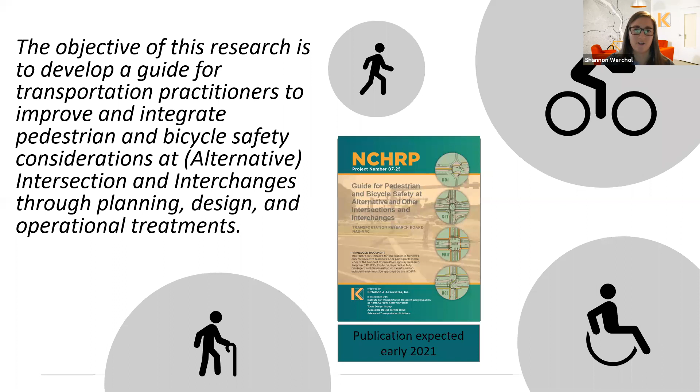We wanted to consider moving beyond just standard accommodations. Oftentimes we get into design and we're working on operations: how long should our turn bays be, how many lanes do we need. Then we move into final design and get all the way to the 90% plans, and then you pause and say, wait, so where are we putting the sidewalks? Or what are we using, bike lanes, are we using shared use paths? You can get pretty far into the design without stopping to think about those things, and that's one of the aspects we wanted to change, moving past standard accommodations.

The guidance document has a methodology that applies to all intersections and interchanges, but we did focus on five specific interchanges and intersections shown here on the screen, and there's a chapter for each of them specifically in the guidance.

Considering the intersection context, we know there are multimodal benefits of alternative intersections and interchanges. We use them because they reduce conflict points, and there's potential for also reducing pedestrian-vehicle conflict points. By moving towards simplified two critical phase traffic signal control, we can reduce the confusion of pedestrians about when is their appointed time to cross the street. There's benefits there—alternative intersections tend to provide lots of ability for refuge islands, breaking up the crossing distance to address pedestrians who may be moving slower or need additional time to cross for various reasons.

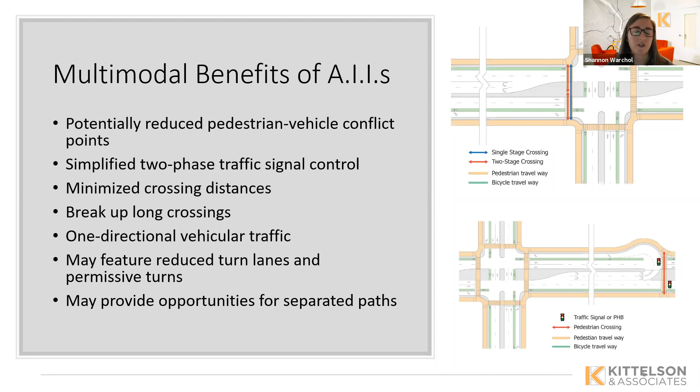But there's great opportunities in alternative intersections for separated paths. In general, the land use that you would need for an alternative intersection is less than what you would need for a comparable standard intersection or interchange of the same capacity. So why not use some of that extra land for pedestrians and bicyclists?

Now, there are some drawbacks to alternative intersections and interchanges when it comes to pedestrians and bicyclists. While we do provide for a lot of refuge islands, that can make for some confusing crossings. Here we have a displaced left turn intersection. You can see that to go from south to north or north to south, you have 4 different stages of that crossing. It may not be obvious to a pedestrian standing at ground level exactly how to get across this intersection, and that's a real challenge we need to be mindful of.

Even though we've separated this, so each crossing you're only moving across one direction of traffic, it's not always obvious which direction that traffic is coming from. A pedestrian crossing at point D may or may not realize which way traffic is coming from and which way to look for potential vehicles. So these are some concerns that we have with alternative intersections and interchanges.

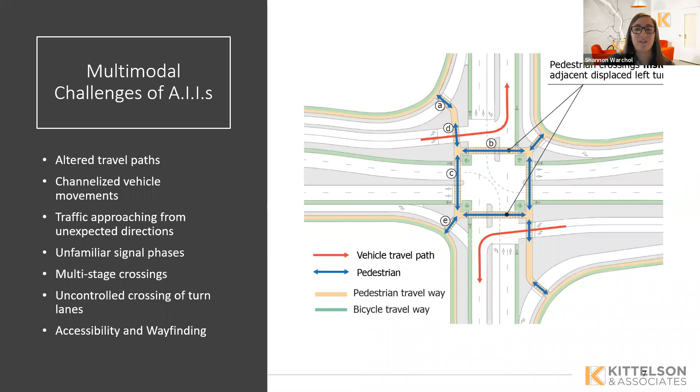But in thinking about this from a performance-based design process, it's important to remember that alternative intersections are just intersections with some unique features. I'll say that again. One of our engineers out in Portland, Brian Ray, is a big proponent of this idea: alternative intersections are just regular intersections with some unique features. So we don't need to approach our design process in some brand new way.

Approach your design process the way that you do for any other intersection, and then just key in on those unique features and really focus in. So from that mentality, we have this performance-based design process, and it starts with identifying your intended outcomes. From those outcomes, you can then make your decisions and evaluate whether or not your design meets your intended outcomes. If your outcomes are not met, then you either need to adjust your outcomes or adjust your design. We can repeat this cycle until we've moved to our construction set.

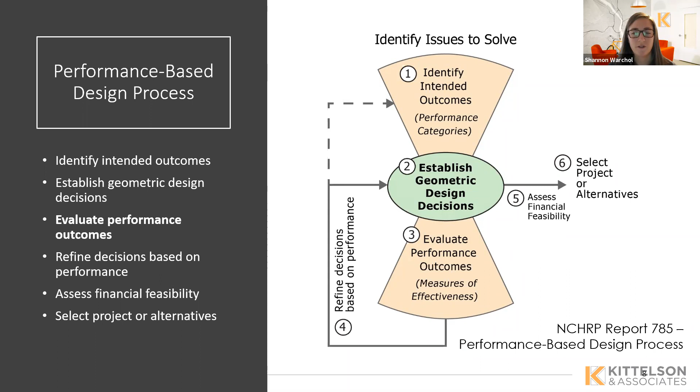The methodology that we developed in report 948 is intended to be integrated with ICE, the intersection control evaluation process. ICE, as it exists currently in about 8 states, with 6 or 7 states working on ICE policies coming up. Pennsylvania has an ICE policy. A lot of those policies focus on operational impacts for vehicles and safety impacts for vehicles, and there wasn't a great quantitative measure of how to evaluate these at the planning level for pedestrians and bicyclists.

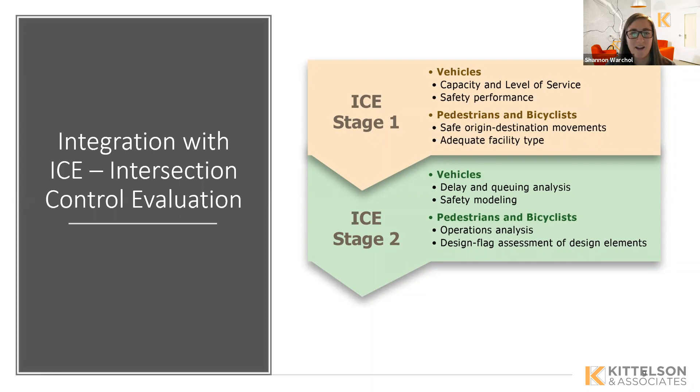So one of the outcomes of this project was looking at a quantitative planning level methodology to evaluate our intersection based on those objectives we identify in the first step. The report details what we call the 20 question methodology, which walks through 20 different questions you should ask yourself about the pedestrian and bicyclist facilities at an intersection. There's a quantitative scoring way so that when you're in that alternatives analysis, you can objectively score one design versus another.

Now, there was a whole separate presentation that focused just on this design methodology. It was, unfortunately, held in the last session, but there's a recording, so go ahead and check out that presentation from Bastian Schroeder if you're interested in hearing more. But I want to focus on the specific intersections, those 4 of the 5 specific intersections we looked at in the design, and kind of unique aspects to consider when designing these intersections.

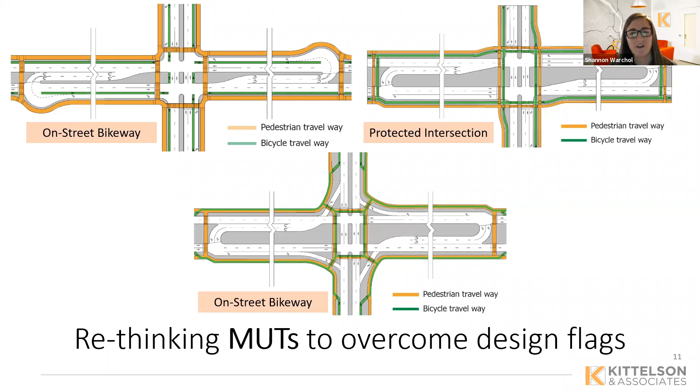So for each of the 4 designs, you'll see that we have 3 or 4 different variations of how they can be placed. Here we have the median U-turns. In the top left, we've provided on-street bikeways with our sidewalks. We have mid-block crossings. On the right side, we presented an example of how a protected intersection concept could be applied to a median U-turn. And on the bottom, it should be a shared use path concept for our bicycles and pedestrians, so everyone is off the roadway on a shared use path and then crossing with the pedestrian movements.

Two things you want to think about when considering median U-turns: that mid-block crossing. One of the great benefits of median U-turns, and even more so of the R-cut, is that it's much easier to provide 2-way progression. Median U-turns are still challenging because both the eastbound and westbound movements are still coupled at that main intersection. But adding a mid-block crossing, while you do have to signalize the eastbound movement where it otherwise wouldn't be, often this westbound movement is already signalized. So if you can provide coordination from your main intersection through to your pedestrians, you may be able to get this mid-block crossing in without major operational impacts to vehicles, but providing a huge benefit to pedestrians who may want to cross at a smaller spacing. So it opens up new opportunities to provide additional spacings for our pedestrians.

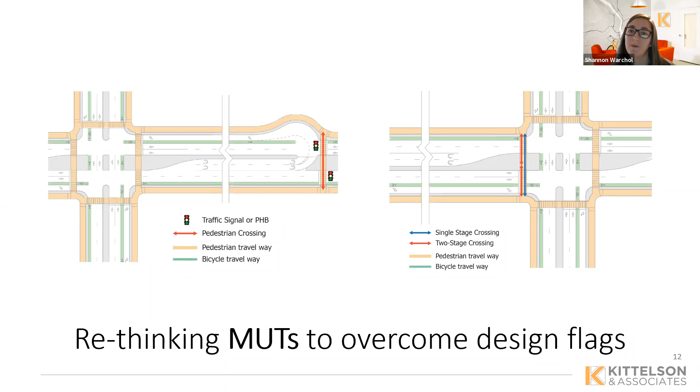The second thing to think about on median U-turns is that they often come with wider medians to allow for wide vehicle U-turns at those U-turn bays. Great opportunity to think about how to stage the pedestrians, whether you want them to cross in 1 stage or 2. Important to think about, if they're going to be staying there for 2 stages, it's really nice to provide a welcoming area for them to wait. We don't want to hit the minimum 6-foot distance. I always think about if you're a parent traveling with a bike trailer - do you have your front wheel out in the road, or do you have your kid out the back in the road? So 6 feet doesn't always accommodate everyone trying to move through our intersections. So if you're going to do that 2-stage crossing, use the right of way you have, give them a nice area to wait so they don't feel like people are whipping past them with inches to spare.

R-cuts, then we had 4 examples of R-cuts. Again, on the top left, we have our on-street bikeway. You can see that we coupled that with a shared use path, so our green lines are our bicycle travel way, and bicyclists here could either be on road or on the shared use path. Nothing says we can only give bicyclists 1 way to move through the intersection - different levels of comfort for bicyclists. Maybe a bicyclist who wanted to make a left turn at the median U-turn, instead of having to shift into that left turn bay, which can be very daunting on these 55-mile-an-hour roads, maybe they choose to use an off-ramp onto the shared use path and cross as a pedestrian instead.

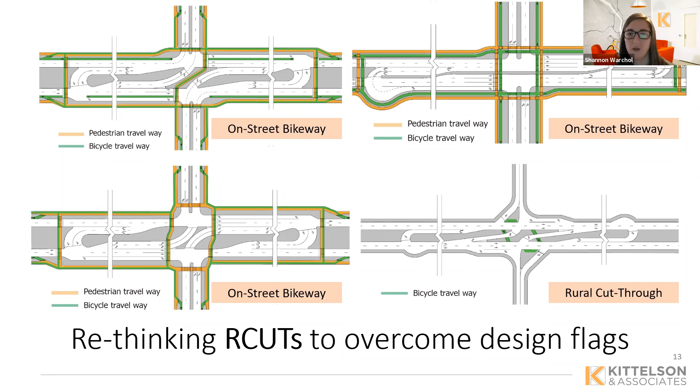On the right side, we have that protected intersection concept. Bottom left, we have our shared use path - looks like some of my labels didn't update here, but it's the shared use path concept, and I'll jump into that one a little bit more in a second. Then on the right, we have the rural cut-throughs. Not ideal here that we don't have a lot of pedestrian and bicycle facilities, but an easy way, if we do have an R-cut that we want to retrofit, is to add some easy cut-throughs - maybe it's a Saturday bicyclist group that rides through an R-cut often on the minor road, and they just need to cross that major highway. Making some easy cut-throughs for them so they don't have to make the right turn, the U-turn, and then the following right turn.

On the left, we have our bike lane and the path, so again bikes can choose to be on the road or on the shared use path. On the right side, we have our protected intersection concept. And on the bottom, we have an idea called the median walk.

Essentially, instead of making a pedestrian in the northeast quadrant who wants to move west along the intersection detour well out of their way—crossing the north-southbound roadway and then going back north to get up to the sidewalk—why not just walk them right down along that median walk? Now, this requires more right of way. You want to make sure that's a welcoming environment with lots of space. We don't want to just meet that 5-foot minimum, but it's a potential option to avoid extra distance traveled for pedestrians.

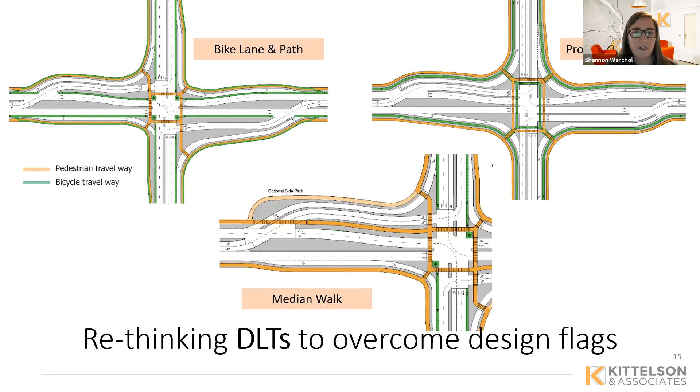Really important for DLTs, critical to think about them before you start your design. They have a huge impact on your operations. You have your outside pedestrian placement on the left and your inside pedestrian placement on the right.

What I want to talk about here is your left turn pedestrian conflict. If you have your pedestrian crossings on the outside, you no longer can cross your pedestrians at the same time as that major street left turn. So a pedestrian crossing movement B would be in conflict with your eastbound to northbound left turn.

Obviously, the great benefit of displaced left turns is their ability to move all the east and westbound traffic together. If you have pedestrians on the outside, you can no longer move eastbound-westbound pedestrians with your eastbound-westbound left turns. So it's very important to understand, from an operations standpoint, how your pedestrians are going to be set up at this intersection, because it impacts the amount of time that left turn has, and all of your queues essentially. If you need an additional critical phase—going from 2 critical to 3 critical—because those left turns need to be separated, that has great impacts on your cycle length and therefore your queues.

On the right side, however, you can do an inside pedestrian crossing. You can see now a pedestrian crossing at crossing B could turn with those left turn vehicles. Now this requires a few more stages for your pedestrians, but the operations are a little bit better. So again, there are trade-offs—neither is better than the other. They both have pros and cons, but it's very important to think about from a design standpoint.

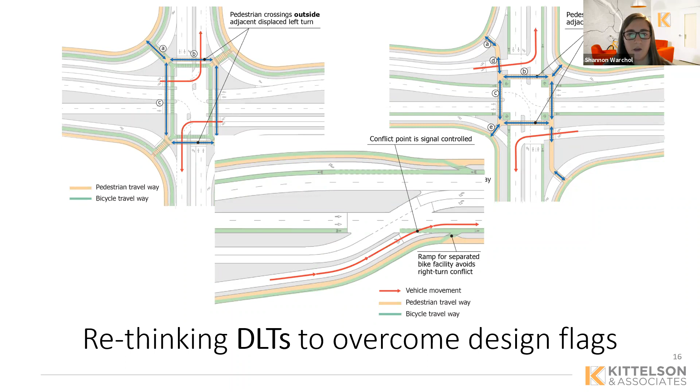Another feature in a number of these designs is this off-ramp feature. Here we have the crossover of a displaced left turn. Our displaced left turn is over to the left of this image, but you can see a ramp here for the bicycle facility. So if a bicyclist chooses, they could remove themselves onto the sidewalk instead of going through the intersection on the main road.

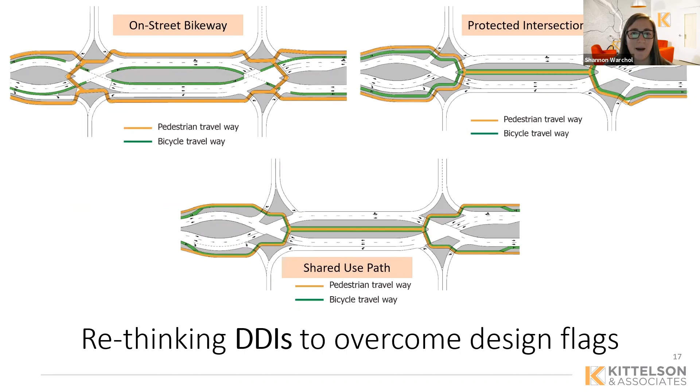And then for DDIs, again, we have our on-street bikeway on the left, our protected intersection on the right, and the shared use path on the bottom. A big thing for DDIs is the inside versus the outside crossing—I think a lot of people are familiar with that.

One thing to really think about on that outside crossing: here we have our one crossover for our DDI. This is what we have highlighted here in the box—the entrance ramp to the freeway. The placement of those pedestrian crossings is critical. We know that if we place the pedestrian crossing upstream of the center of the intersection, vehicles will be traveling at a slower rate of speed because they're slowing down into the turn, and they're more likely to yield to those pedestrians.

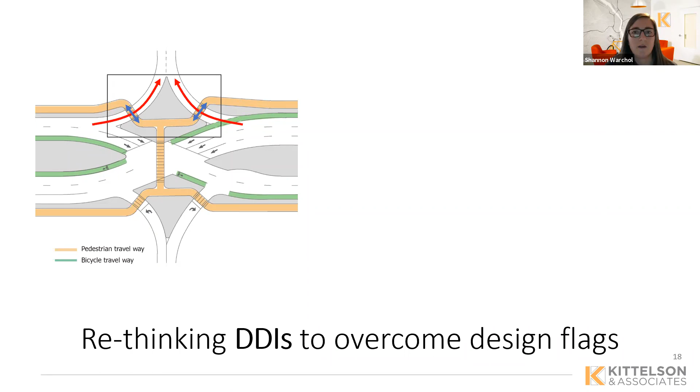Also important to think about: can a vehicle even see our pedestrians? If we have our truck here, we have a pedestrian at our blue arrow or blue dot—do you think that truck can even see that pedestrian to yield to them? Very likely not—they're hidden away behind the curve. So thinking carefully about where those pedestrian crossings are placed is essential.

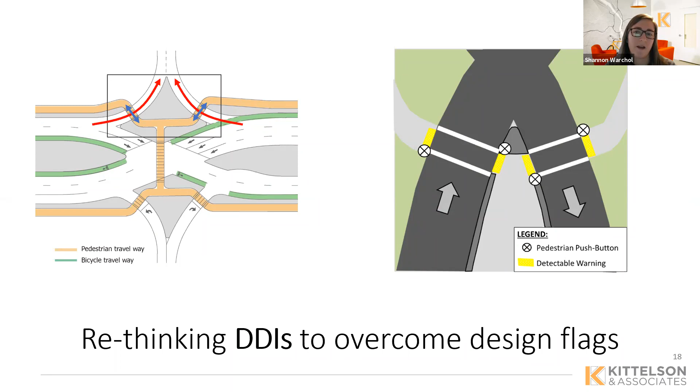Also thinking carefully about where your pedestrian push buttons are placed. We still want to try and meet the APS ProWag guidance of 10 feet separation between push buttons. It's important to think about how to place those. Here's our recommendation at your crossover for how to place them. So the DDI guide is a separate standalone report.

It's coming out also early next year, so look out for that. There's additional DDI guidance for pedestrians and bicyclists in that report as well.

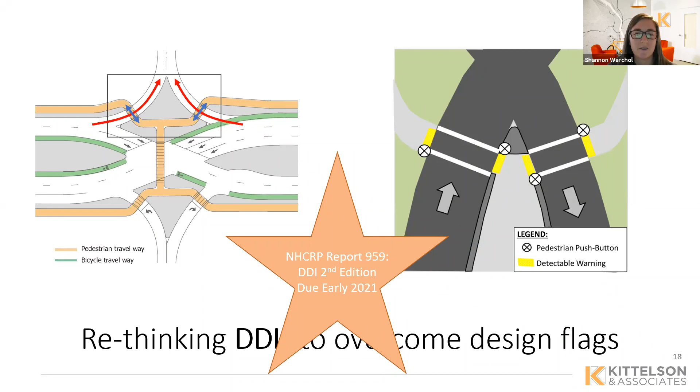I want to end my presentation where I started, with a disclaimer. None of these designs that we showed here are without flags. With that 20-question methodology, there probably isn't a design without flags, but it's critically important that you don't wait until your 90% plans to locate those pedestrian and bicycle facilities. You want to get them in there early during your alternatives analysis and let that assessment of the 20 questions guide your design from there through.

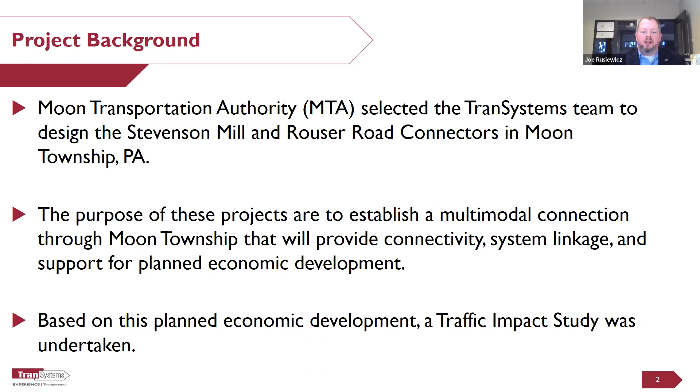So who is the Moon Transportation Authority? They were established in 1986 by Moon Township to improve and construct transportation infrastructure that promotes economic development and enhances safety and welfare of the Moon residents. They're funded through the Local Economic Revitalization Tax Assistance Revenue Allocation Program, known as LERTA RAP.

It's a mechanism that finances transportation infrastructure improvements in the designated transportation district. Properties within that district are exempted from local taxes on the value of new buildings or improvements to commercial properties for 10 years. And in turn, they contribute those funds to the MTA of the exempted taxes to advance priority transportation projects identified by the township.

Right now, in the current district, any building that has a permit issued on or before April of 2026 in this designated district is eligible to participate. So essentially, they're going to pay the taxes one way or the other, but this way helps advance local transportation projects within the network of where they're putting their commercial building. The MTA board consists of 2 Moon area school district board members, 2 Moon Township supervisors, and 1 Moon Township business member.

So to give you an idea of the scope of the project, here's a bit of an overview map. Both the Stevenson Mill Connector and the Rouser Road Connector projects are going to create that system linkage. As it stands today, this portion of Stevenson Mill Connector, where you see the forested area, is not yet constructed. And this portion here of the Rouser Road Connector is not yet constructed either. So it's kind of a broken network that we're hoping to aim to connect.

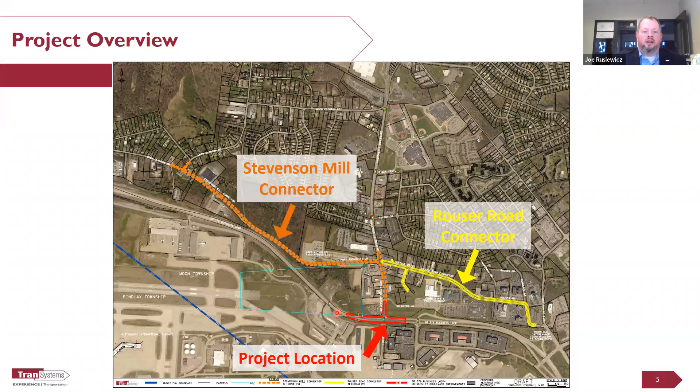Other of interest is this Port Authority of Allegheny County park and ride facility, and this is also a U.S. Army Reserve base facility as well. So this area highlighted in red down here shows the project location.

To start off the project, we met with PennDOT to go over the planned traffic count locations so that we could perform a comprehensive analysis of the area roadways. As we moved the project forward, we continued to have regular meetings with the District 11 Traffic Unit to make sure they were on board with our proposed improvements.

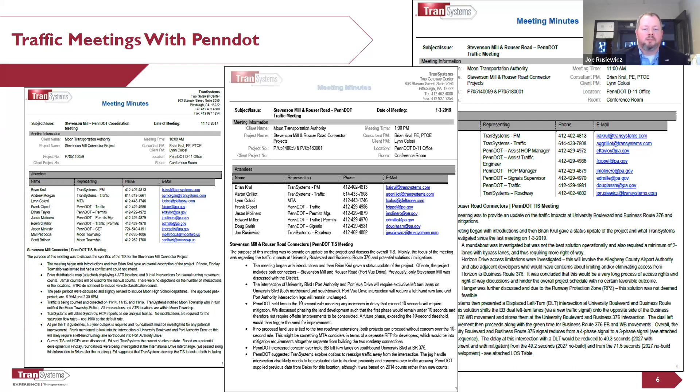Here's a layout of our traffic count locations. We performed turning movement counts at 12 various intersections throughout the area and automatic traffic recorder, or ATR, counts at 5 locations. University Boulevard is the spine here, along with Business Loop 376. We counted all along University Boulevard up to Moon Clinton Road, both PennDOT routes, as the Stevenson Mill Connector would connect to both. So we looked at the whole transportation network contributing to this area.

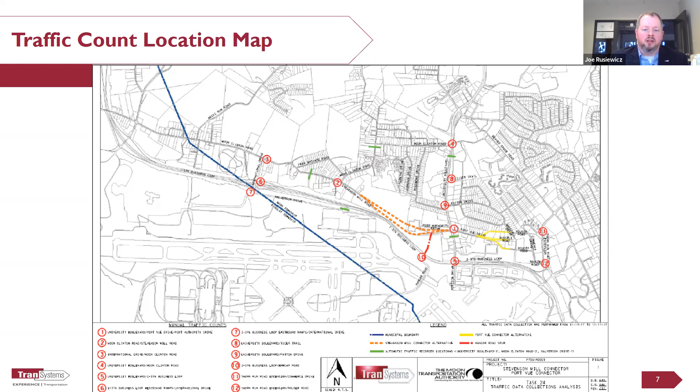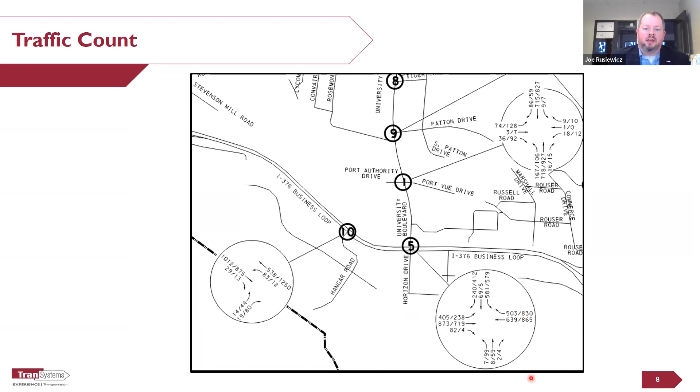As you can see by the counts at the lower part, we're dealing with roughly 800 through-movement vehicles and a significant amount of turning volume, 400 cars turning left on the approach to Pittsburgh, and the dedicated right turn has 500 in the morning and 800 in the evening.

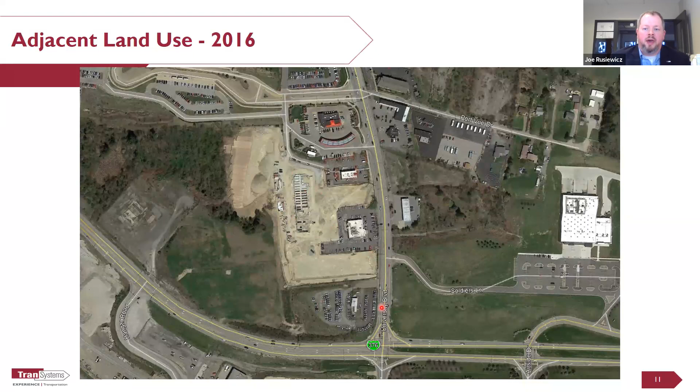Before we could complete our traffic impact study, it was noted there'd be some changes at this out-of-use car dealership. A new retail space known as University Center was under development and needed to be added to the background traffic. So we used the planned land use they were proposing for that development to add trips to the background traffic. And you can see now from 2019, that development's in place, and the hotel has been constructed. So that was all now accounted as part of our base model.

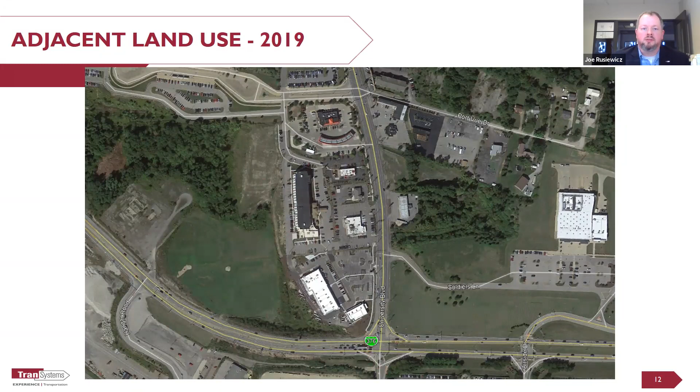So again, we took that and assigned the background traffic based on the trips generated from the land use types. That gave us our combined trip generation shown here for the overall model.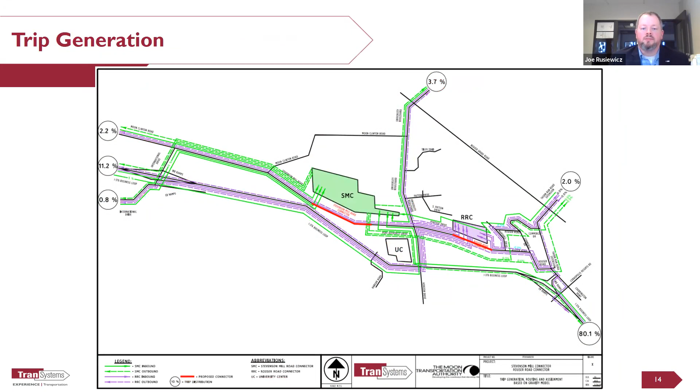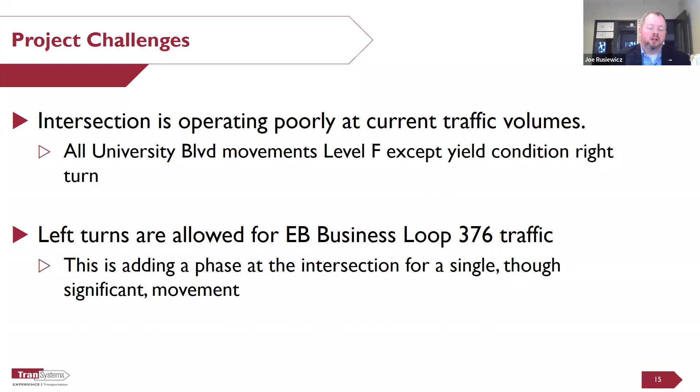So what project challenges were we now facing, now that we had the model? The intersection of University and 376 is operating poorly at the current traffic volumes without adding any additional development. All University Boulevard turning movements and traffic movements are level F, except the yield condition right turn. They're all failing today. And left turns being allowed for the eastbound Business Loop traffic heading towards Pittsburgh adds a whole other phase at the intersection for a single, though significant, movement, while the left turn movements from the other direction have already been restricted. So we're allowing just the 2 left turns to go, adding a whole other phase.

So some potential solutions that we looked at — this all started before the ICE policy came into effect with PennDOT. So we essentially did a mini ICE policy, in that we looked at several solutions to see what provided the best solution at the intersection.

As mentioned before, we already had 2 left turn lanes coming on eastbound 376, a dedicated left and a through-left with very few through movements, so it's almost acting as 2 lefts coming off University Boulevard. To get that to work, triple lefts, not exactly ideal. There are some in this general Western Pennsylvania vicinity, but it's the concept of just continuing to build yourself out of problems, and more pavement in this area didn't seem to be the solution.

So what we looked at was, can we provide an additional intersection at Hangar Road, where there's already a signal on 376 to the west? Can we provide a roundabout at this intersection, or something more innovative like a displaced left intersection, to provide the answers we need?

So this option we considered was to create a full 4-legged intersection at the existing intersection of Hangar Road and Business Loop 376 by making a spur off of the proposed Stevenson Mill connector. This would take a significant number of left turns out of the University 376 intersection and hopefully move it to here, helping to relieve the already poorly operating intersection.

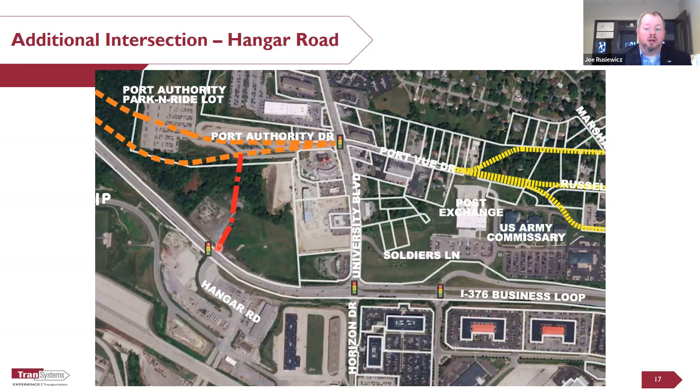Those through movements are operating well, so we could just add some traffic there. However, as we were moving the project along, it was determined that the spur road would lie within the runway protection zone of the adjacent runway of Pittsburgh International Airport. Upon coordination with the airport and the FAA, the roadway is not permitted within the RPZ, so this option had to be abandoned.

We reviewed several alternatives for a roundabout. Some of the concerns were it would likely have to be a multi-lane roundabout, most likely with a 3-lane approach on that western leg heading eastbound, with right turn bypass lanes on at least 2 approaches. Motorists in this region are not used to modern roundabouts, so multi-lane as one of the first was not really an ideal solution. The bypass lanes would also be difficult to construct due to the adjacent properties, the new development of University Center, and just some other concerns in the nearby vicinity.

One of the concepts we considered is shown on the screen. Even in this configuration, you'll see that whole leg of the triple approach is already operating at level of service D, and the VC ratio at opening was already just under 0.92. So we're pretty much at capacity with the triple lane already. This didn't seem like a viable solution either.

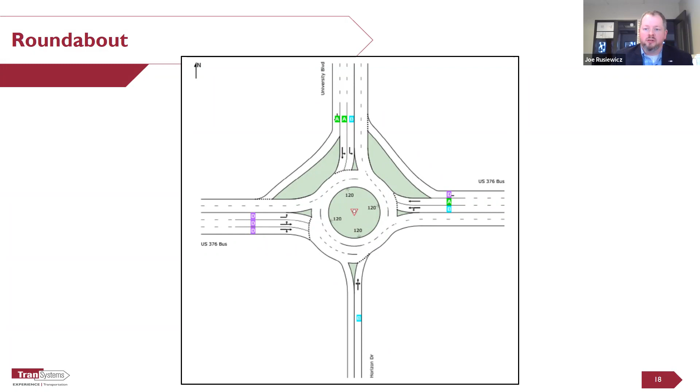So the displaced left intersection was investigated as a third alternative to help with the increased traffic. Upon initial layout and traffic analysis, the results were promising. This was an early layout of the intersection. Upon coordination with PennDOT District 11, they concurred with the proposed intersection type, contingent on the modeling showing that it all works.

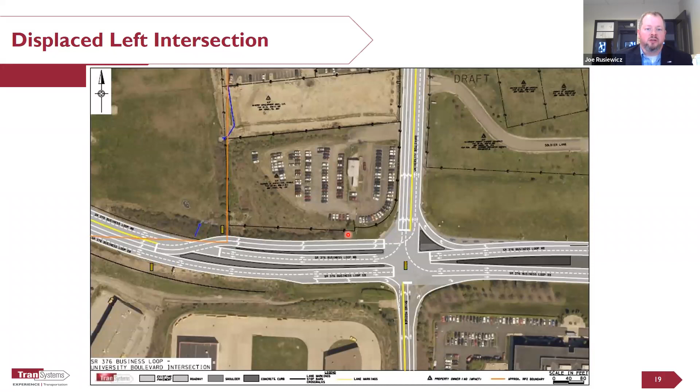Some highlights you'll notice: what we did is we added this intersection to the west of the project location, and that would take those 2 left turn lanes and bring them and cross them over, storing them along 376 to the north of the westbound traffic. This happens within the existing footprint mostly. We do have to push the pavement out a little bit to incorporate it, but we only need about 1 additional lane of pavement, as opposed to adding an additional lane on multiple legs. This solution would allow us to expand a little bit and keep us from impacting that new development.

So the current signal is 4 phases. The overall level of service at the signal was a D with around 49 seconds of delay, and it drops to level of service E in the 2027 build scenario. So we'd violate the 10-second threshold that PennDOT allows for the new development, so we had to come up with that solution. That proposed displaced left turn dropped it to 3 phases, actually leading to a 2027 build scenario of 40 seconds delay, slightly improving on the no-build condition.

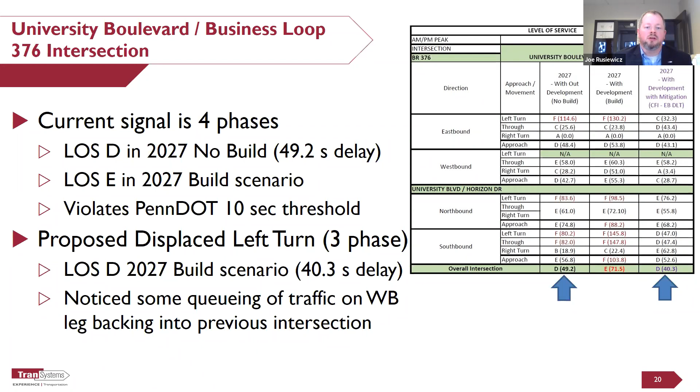However, we did notice some queuing of traffic on the westbound leg backing into an adjacent intersection. It was showing queuing backing into the intersection of Business Loop 376 and Airside Drive. This was due to the additional development adding traffic to Stevenson and Rouser coming from Pittsburgh looking to turn right. The dedicated right turn lane there today only has about 300 feet of actual storage and a very long taper, and there's actually 675 feet of storage from stop bar to the previous intersection.

So this intersection was originally agreed to be outside of the study limits, but with the potential impacts hitting at Airside Drive, we returned to count the intersection and added it into the model to ensure that we could come up with a solution that wouldn't have queuing issues back at Airside Drive.

So ultimately, after several iterations and different looks at how we do the intersection, the solution that works is to make a dual right turn lane off of westbound 376 onto University Boulevard that will be signal controlled. There's 2 lanes to receive there, and we'll bring 2 lanes into it.

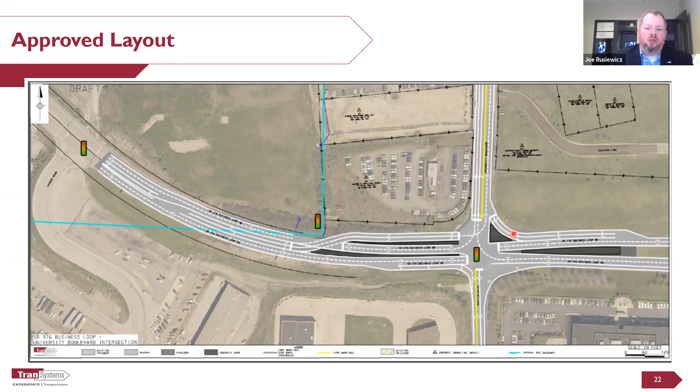We didn't feel it was safe to merge 2 lanes in, and PennDOT had concerns with it. So it was decided to have them brought in with signalization, but the dual lanes allow us to get the needed storage to make sure we get enough cars off of the through lane so they're not backing into that previous intersection.

So then just to show what volumes we're looking at in the proposed condition, we were talking about 800 through movement and roughly somewhere in that ballpark of 500 to 800 turning movements. You can see, I think this was 500 turning right movements in the morning, it's now 850. And then in the evening, it was 800 and it's now up to 1,059. So you can see that definite increase.

Today's volumes were still fairly high in that area, so there's probably that there might be some backing and queuing issues today due to that low storage level, but this solution would help take care of that and handle it all. And as you can see, Horizon has very low traffic, so that wasn't a major factor in this, but this allows us to get those traffic movements. In the morning peak, you're seeing almost 500 vehicles using that displaced left.

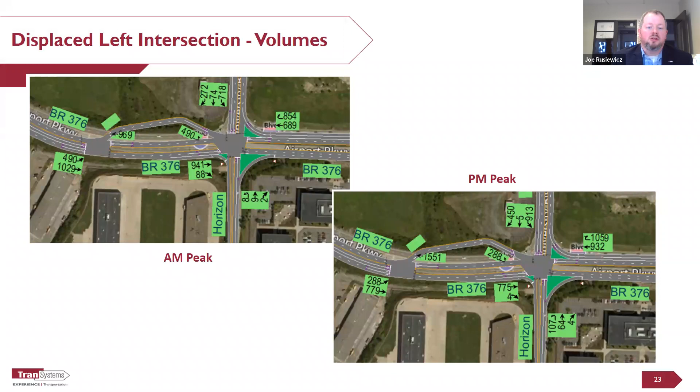So the final solution that we came up with, the University 376 intersection has a level of service D, and the actual displaced left previous intersection to the west has a level of service B. PennDOT asks for a weighted average, so those actually end up as a level of service D as well in the 2027 full build development with the mitigation in place.

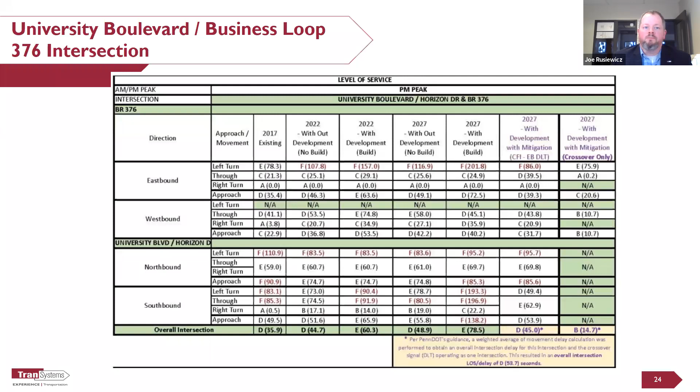So what are the next steps on the project? The TIS has been approved by PennDOT and the township. The project's currently in preliminary engineering. Final design is scheduled to begin sometime next year. And what we really hope for is that we look forward to coming back and showing off the final product with final design schematics and hopefully some construction images in the next couple of years.

So with that, are there any questions?

This is just a picture of what it looks like out there today. So knowing that those future roundabouts are coming, the purpose of this study was to determine any lessons learned that can be derived from this intersection. Of particular importance was the modeling software.

We do get into the SIDRA and HCM methodologies, and we wanted to see which one is more accurate in this case. To put this project development into perspective, the project was opened in 2018, but was analyzed in 2012, and since it was designed there had been some updates to the HCM and roundabout design in general.

It's been almost 10 years since the roundabout guide NCHRP 672 was published, so it was important to see how the design was working. Both 222 and 662 are signed as north-south routes, but for everybody's orientation throughout this presentation, I'll be referring to 222 as east-west. This is a hybrid roundabout with 2 entry lanes on 222 and 1 on 662, also known as a 2x1. The roundabout itself has an inscribed circular diameter of 185 feet, out to out.

One of the things that first came to light was that it was designed for side-by-side WB67 semi-trucks. In 2012, Wisconsin DOT and Minnesota DOT published their joint roundabout truck study, which looked at how tractor trailers navigate roundabouts. They came up with 3 roundabout cases, differing in how trucks utilize entrance lanes. Case 1 straddles both lanes, case 2 utilizes the gore area, and case 3 the truck stays within its own lane throughout. There are reasons to select different cases, but some designers recommend case 1 regardless of truck percentages, since truck drivers tend to do what's needed to get around. So it was a surprise when we found that the 222 roundabout was designed for side-by-side movements, which exceeds the most conservative of the truck cases.

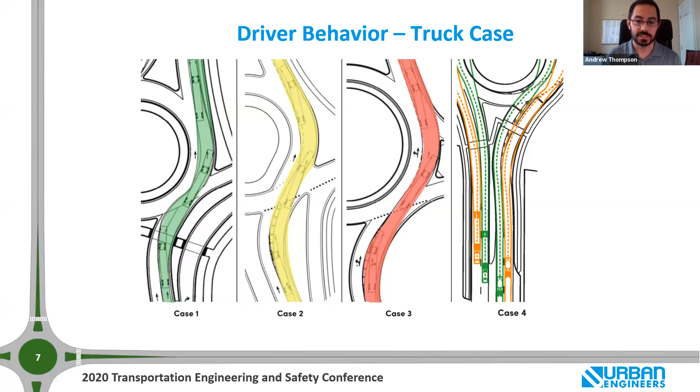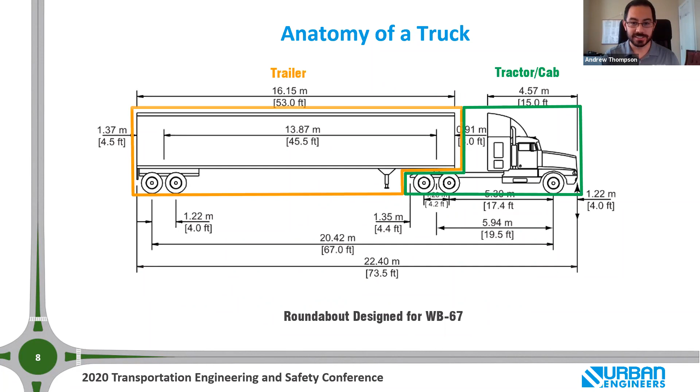So that's one half of the equation. The second half is the design vehicle. If you were at my presentation last year, we covered this in more detail, but as a quick refresher: this tractor and trailer combination governs the length, but the two dimensions we want to focus on are the wheelbase, which governs the swept path of the vehicle. In this case, the wheelbase is 67, hence WB67. But oftentimes we see tractor trailers on the road and assume it's a 67 because it's a 53 foot trailer. What we really care about is the distance between the kingpin and the rear axle group, which really controls the wheelbase and swept path.

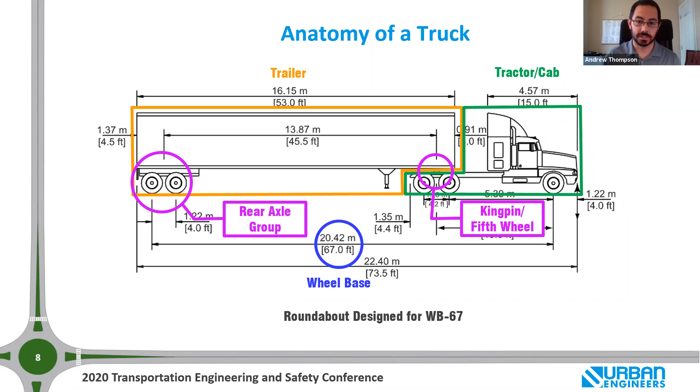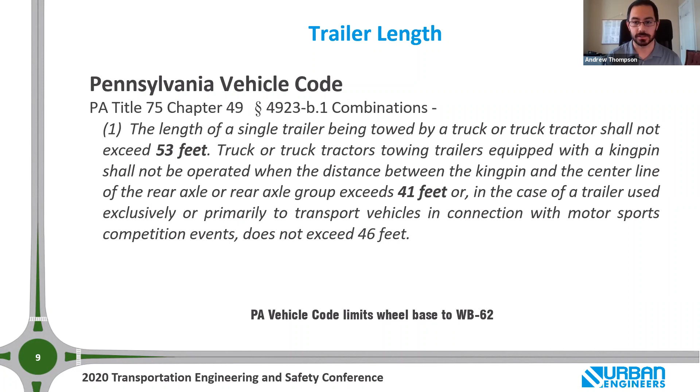For a WB67, that wheelbase is 46 feet. But when we look at the vehicle code, it limits the kingpin to rear axle group to 41 feet, which in reality means looking at a WB62. There are a couple of exceptions, but the overwhelming majority of tractor trailers in the Commonwealth are WB62s. This is also consistent with the AASHTO Green Book, which suggests using WB62 where applicable. For these reasons, we've been recommending a modified WB62 be used, because it accurately represents what's most commonly out there: a 41 foot max kingpin to rear axle group, as well as the 53 foot trailer length.

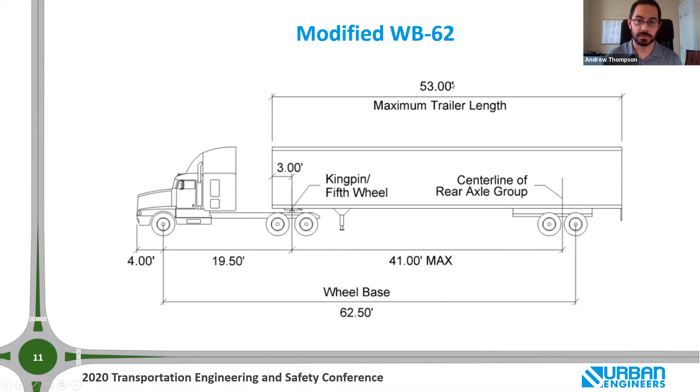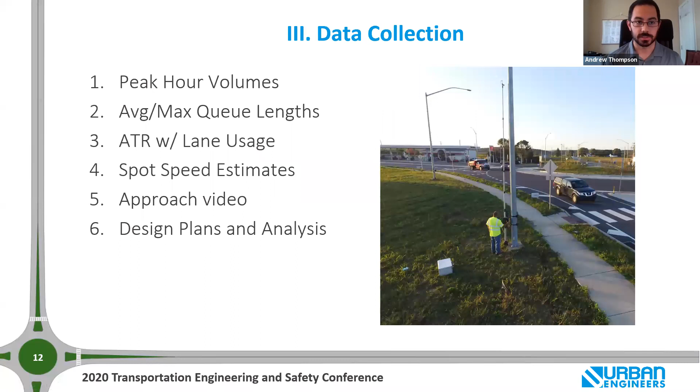To answer one of our major objectives, which analysis tool is more accurate, we took a deep dive into the analysis assumptions made during the design, first of which is growth. We wanted to see if the actual volumes in the field met the projected volumes. We were surprised to find that during planning and design of the intersection and corridor, the assumed growth rate was greater than the actual growth rate. The assumed growth rate was 1%, which doesn't sound like a lot, but comparing what was collected versus what was projected, we have a 33% difference between what was projected and what was collected.

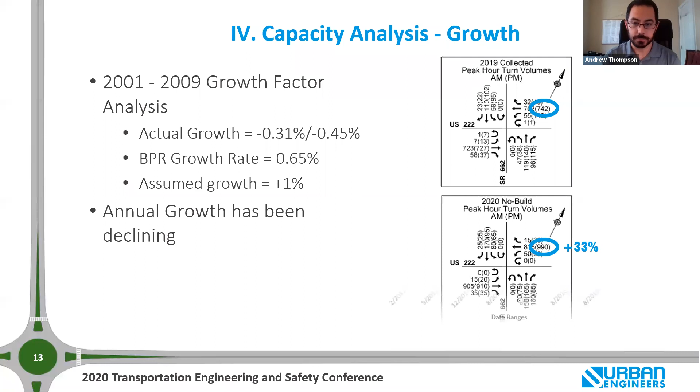So we wanted to figure out some reasons why. Why would this be happening? Why aren't we seeing the traffic that was projected? One reason may be that the actual growth rate in the region has been declining. While not shown, ADT volumes on 222 and the cross streets have stayed around the same or decreased since data was collected in 2007. This growth rate chart shows PennDOT's compound growth rates for rural and urban roadways in Berks County. Both rates show significant decreases in growth. It doesn't mean traffic isn't growing, it just means it's leveling off.

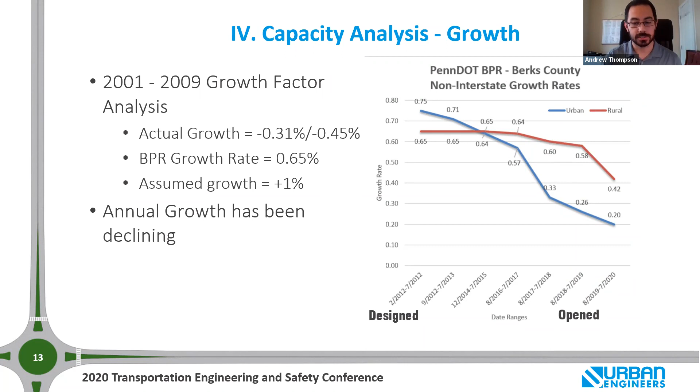Another reason why we aren't seeing the peak hour volumes is that the adjacent signals may be metering the vehicles that aren't getting to the roundabout, which doesn't fully explain the difference in ADT, but does explain why we aren't seeing the peak hour spikes. But part of that is there may be latent demand, because this is known as a congested corridor, and vehicles and drivers may be avoiding it for parallel corridors.

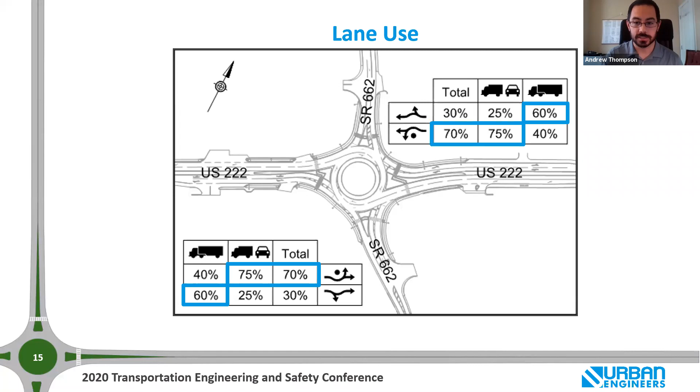The second thing we looked at when calibrating our model was lane use during peak hours. Regardless of peak hour, 70% of all vehicles are using the inside lane. That's in stark contrast with passenger vehicles and single unit trucks, which utilize that inside lane even more, while semi-trucks tend to buck that trend with 60% using the outside lane.

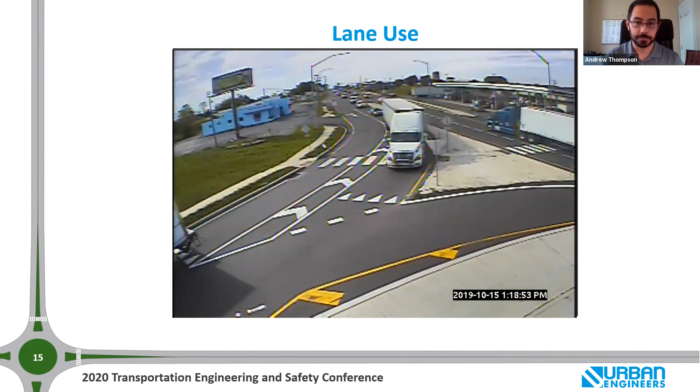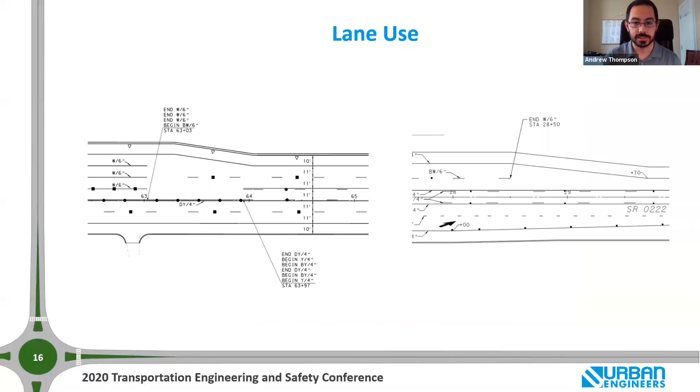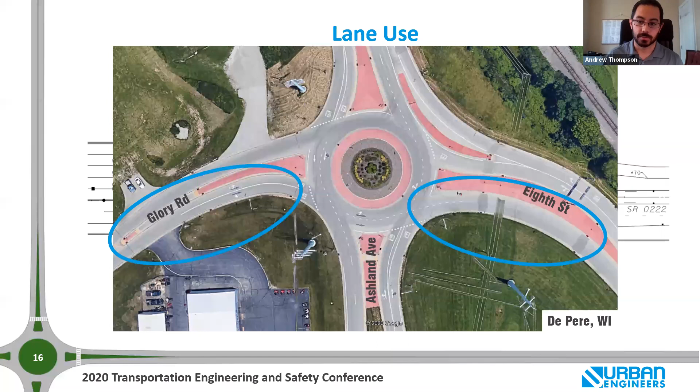An additional reason may be geometric. Pictured are two examples of lane adds proposed for the 222 corridor. It's kind of difficult to see which one is the auxiliary turn lane and which one's for a roundabout. Compare that to this example in De Pere, Wisconsin. On Glory Road, we see this long flare that gives no preference for either entrance or either lane. And then even on the exit, we see a short zipper exit with no preference given to who merges to who.

Now that we had the lane utilization and turning movement counts, we wanted to do an apples to apples comparison of the HCM method, which is the US method, and the Sidra software. We used the new turning movement counts, and not surprisingly, found a significant improvement with the Sidra model. However, both VC ratios, that's volume to capacity ratio, are less than the recommended 0.85, which is good news for the corridor because it means there's room to grow.

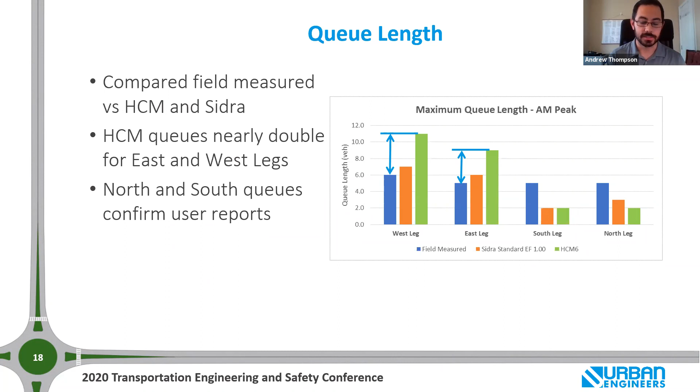In order to determine which model is more accurate, we compared the model to the field measured outputs, namely the maximum queue lengths. We looked at the AM peak hour, which had higher volumes, but when we compared the calibrated models to the max field queue lengths, the HCM queues are nearly twice as long as the field measured one. This intersection is only one data point, but from this result, Sidra appears to be the more accurate capacity model.

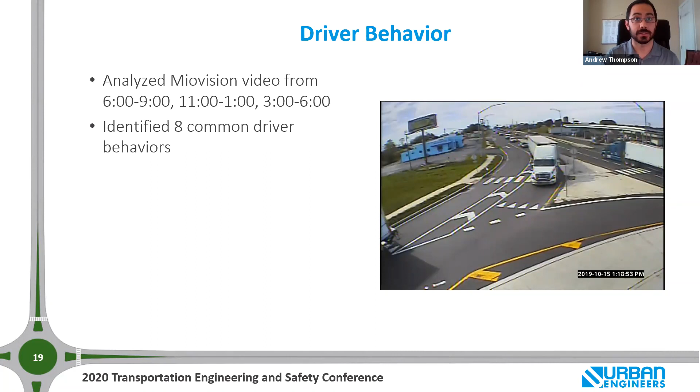Our analysis also covered identifying common driver behaviors. Our team watched 32 hours of video and identified 8 common driver behaviors, which I'll touch on briefly. The most common is straddling both lanes while circulating. You may recognize this as the truck case 2, more common with trucks approaching from the outside lane. Trucks on the inside lane also use the truck apron when necessary.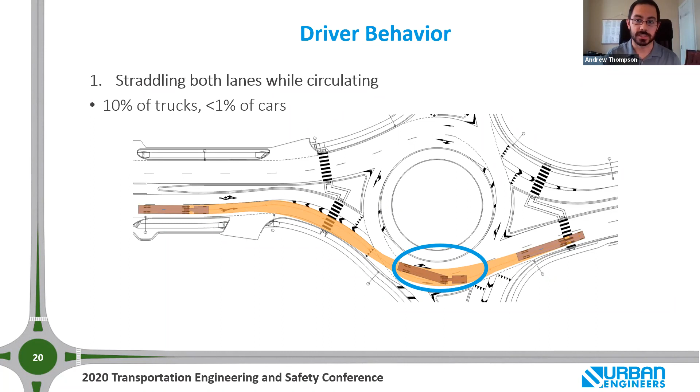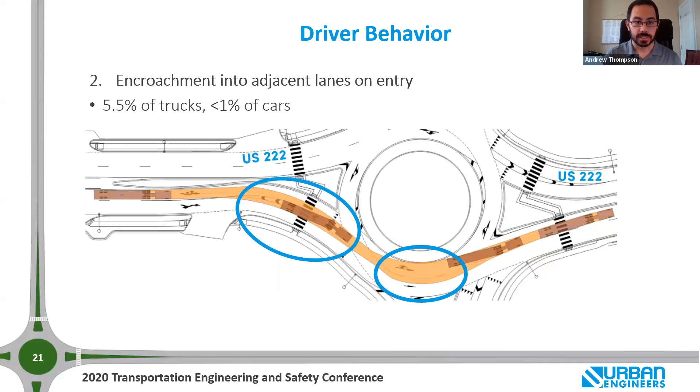Second, we had trucks encroaching into adjacent lanes on entry. They'll start on the inside lane and then cross over into the outside lane as they're circulating, trying to take that fastest path. Third, an additional 4.4% of trucks change lane from the outside entrance lane into the inside circulatory lane, so that's crossing from outside to inside.

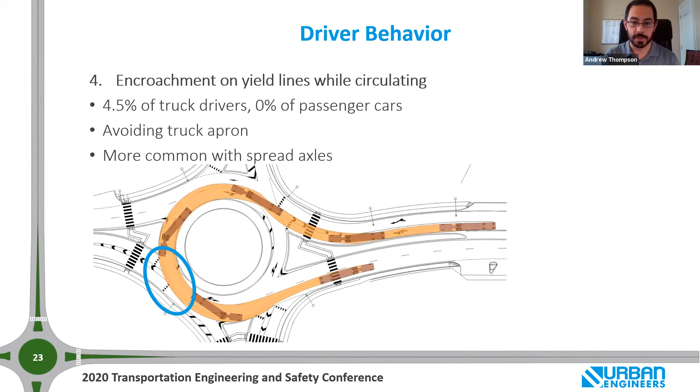Number 4 was more of a unique behavior with trucks with spread axles - when truck drivers utilize the single circulatory lane, they tend to drive over the yield line of the cross street. Spread axles have wheelbases that are effectively shorter than WB62s, so it appears they're trying to avoid the truck apron, as you can see in the diagram. WB62s, which have longer wheelbases, still have to utilize that truck apron.

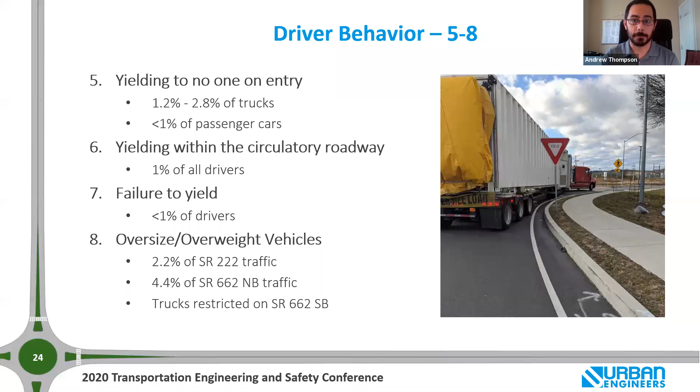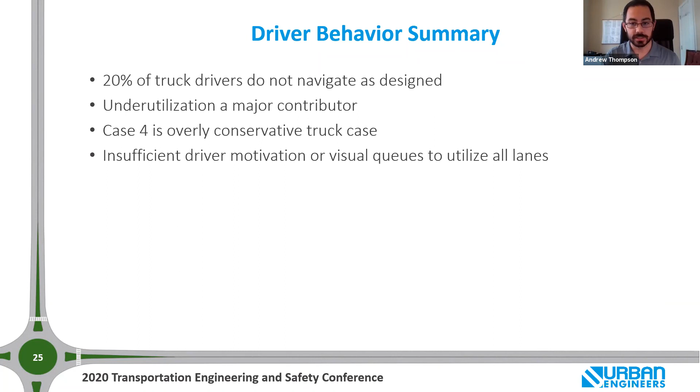There are a few last behaviors with lower percentages worth mentioning: yielding to no one, yielding within the circulatory roadway, failure to yield, and oversized or overweight vehicles, which are fairly common. In summary, 20% of trucks did not navigate the roundabout as designed, suggesting the roundabout is currently underutilized. If you don't have vehicles next to you, there's less incentive to stay in your lane, especially if you're trying to maintain speed. The truck case is likely overly conservative since there's more room to make mistakes. And lastly, in regards to lane utilization, there appears to be insufficient motivation or cues for drivers to use both lanes.

Next, we wanted to look at the preliminary roundabout reportable crashes. Although it hasn't been very long, in the 5 years before construction started there were about 34 reportable crashes, compared to the 17 months between when the roundabout opened and our study, when there were 32 crashes in 17 months. If we extrapolate that linearly, that's approximately 113 reportable crashes in 5 years, which is a concern. When we looked at why, the crashes are concentrated at the multi-lane entrances, with side swipes being the most common, and almost all of the crashes involve trucks and a failure to yield.

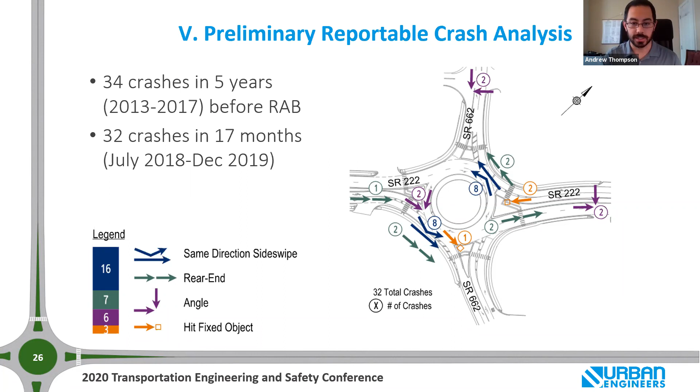We tried to look at some contributing factors, and part of the reason for the higher number of crashes relates to underutilization. It's fairly common for multi-lane roundabouts - if there's a lower VC ratio, you tend to have higher crashes. Part of that has to do with the conservative truck case, which resulted in larger curb radii and faster paths, meaning drivers may find it hard to yield in tight situations.

Lastly, part of it may be the entrance geometry. You can look at this area here - that low angle between the circulating line and the yield line looks a lot more like a highway entrance where you're trying to merge than a roundabout where you need to yield.

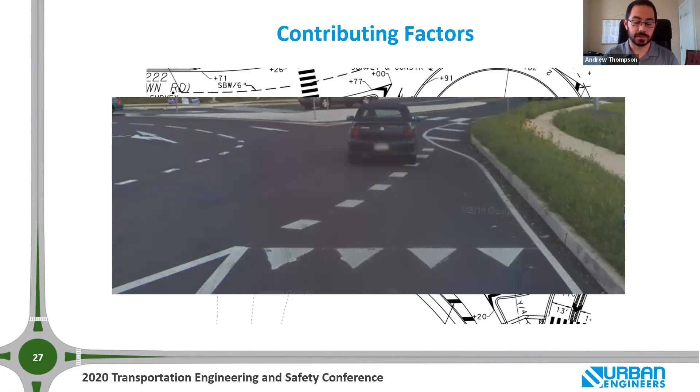So one of the things we recommended is simplifying the pavement markings to make the entrance line more perpendicular with the outside curb. During our research, we found that similar improvements resulted in a 37 to 80% reduction in property damage only crashes at other roundabouts.

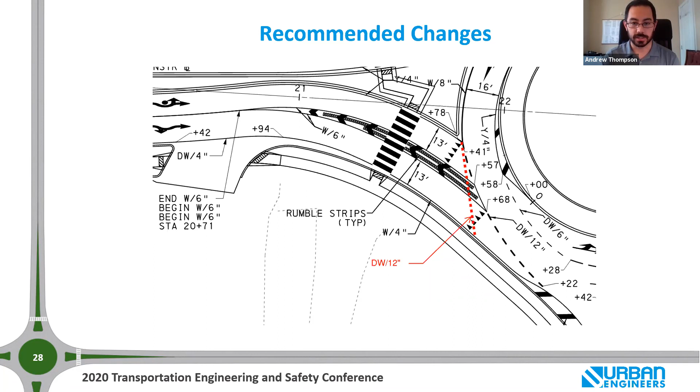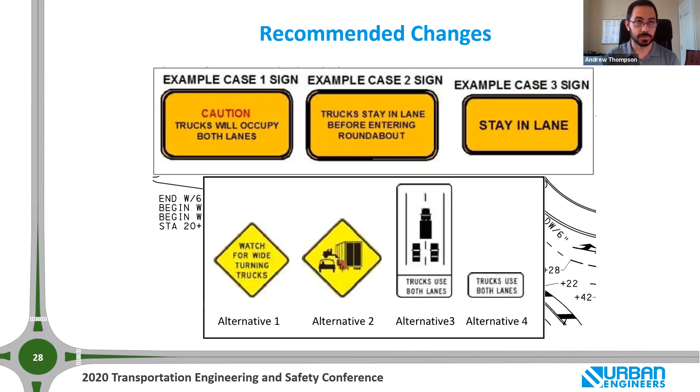Something recommended in the 2012 joint roundabout truck study was additional signage on approach to educate drivers that they should avoid driving next to trucks within the circulatory roadway.

I know it doesn't sound like a lot, but the pavement marking can have a significant change to how drivers experience the roundabout. In the current condition, drivers are almost looking completely over their left shoulder. Compare that to the proposed condition where it's directly out of their side window.

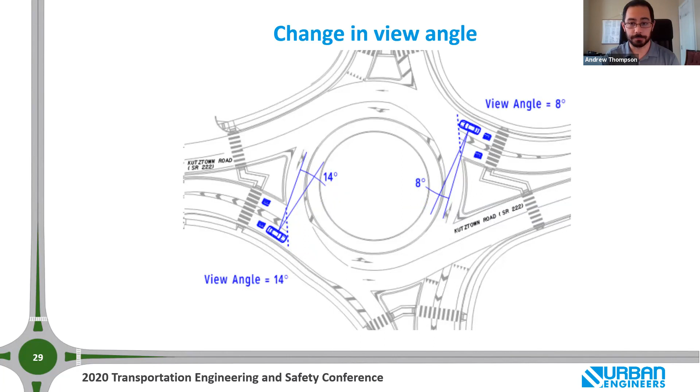We also looked at comparing the fastest paths with the actual path speeds, specifically what are called V1, V2, and V3 - the entering, circulating, and exiting speeds. One thing to keep in mind is that the fastest path analysis and methodology is not meant to look at expected speeds, but rather theoretical attainable speeds.

So as you might imagine, we expected speeds slower than the fastest path speeds. The table on the left compares the estimated speeds and maximum speeds measured, and the figure shows where those speeds were measured. As expected, measured speeds are below estimated, with the exception of the southbound circulating and exiting speed.

However, speeds do not exceed the acceleration method estimate, which is also mentioned in NCHRP 672. So I think it's important that we take those V3 speeds with a grain of salt - we want to make sure we don't overestimate their importance.

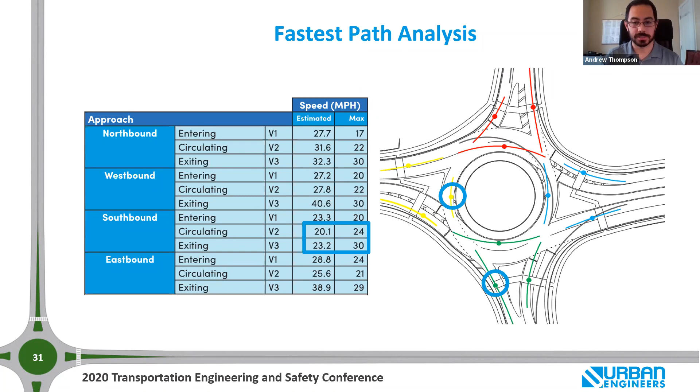Finally, we went out and performed field review and met with the Fleetwood Police Department and the Township Roadway Master. I have a lot of bullets, but I just wanted to touch on three. The first thing the chief brought up was that trucks were unintentionally clipping cars against the truck apron. Often the police will chase down the truck and have no idea that it happened, since it's in their blind spots.

Number two is that drivers are aggressive trying to pass trucks at the roundabout, since this is the only opportunity for miles to pass tractor trailers. With 20% trucks, cars are eager to get by, but this will ultimately change with the final widening.

Last, the Fleetwood Police Department chief noted that they're enforcing failure to yield and truck configuration. In his words, trucks need three panels from the end of the trailer to their wheels.

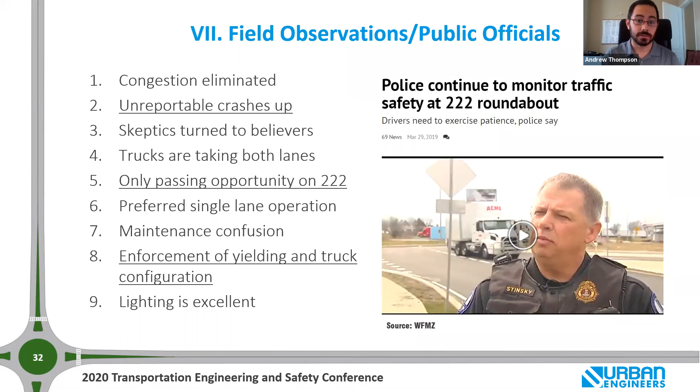So in conclusion, based on queue lengths, SIDRA tends to be a more accurate roundabout software for this intersection. One of the major lessons learned is that phasing these sorts of projects is important, especially if you're going to start the corridor improvements in the middle.

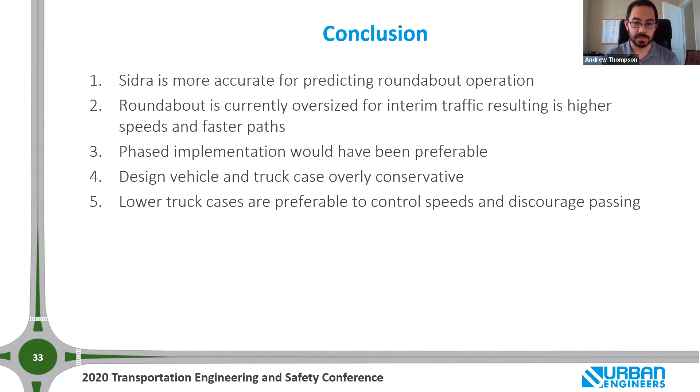Anecdotally, the police chief said the roundabout was opened as a single lane during construction and there were no crashes - compare that to when it was fully opened. Lastly, it's important to use the appropriate WB62, and less conservative truck cases may lead to fewer crashes moving forward. So with that, I'll say thank you.

That's great, Andrew. Thanks for your summary of that recent report. And I guess with that, does anybody - we have 5 minutes for Q&A here for any of the panelists.

Right now, Andrew, there's an open question about whether roundabout designs have accounted for the possibility of autonomous trucks. I know that's something that's of conversation. I haven't heard any good answers for it yet, other than I know that they're working on it.

I also wanted to mention something in the chat from Steve Stewart, saying that the operation will likely change with the future 5-lane. That's definitely something we talked about with the district and with central offices, noting that this is an interim condition - things are going to change. So I just wanted to highlight that. It's a good comment.

Another question: was there any discussion on the potential for providing raised lane dividers, or vane islands, in the circulatory roadways, something you see in turbo roundabout design? We did look into that, and looked at potentially using rumble strips or mountable curbed vane islands. That was recommended during the PE phase. However, at the end of the day, they didn't want the noise associated with them, and the maintenance group didn't necessarily want those raised vane islands to be part of the design. So a good comment and a good design element to incorporate on other roundabout designs.